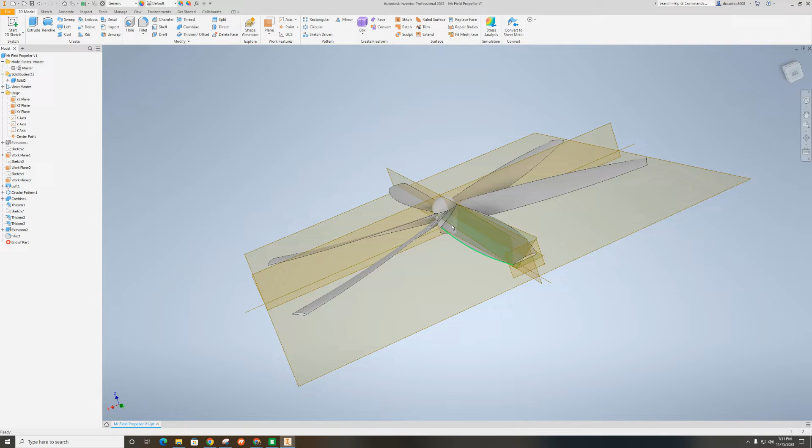I would ask that you guys think about the way you want to design yours. I did a 2-inch long blade, 6 of them, with a 35-degree angle of attack at the hub. But you guys can play around with variations on this.

Let's just go for it. I'll try to go as fast as I can, but I'll also cover some basics. So this is just going to be a standard IPT part.

Now, for those of you who are new to Inventor and have been using Onshape, you'll notice that the planes, the center point and the axes don't come shown. So what I can do is right click on them and make them visible. I'm going to save time by holding Shift and doing that for all of these.

And now if I hold Shift on the keyboard and use the middle mouse button, which is the roller wheel on the mouse, you can see I can rotate around and have that blue cube on the right, just like in Onshape. Okay, so here we go.

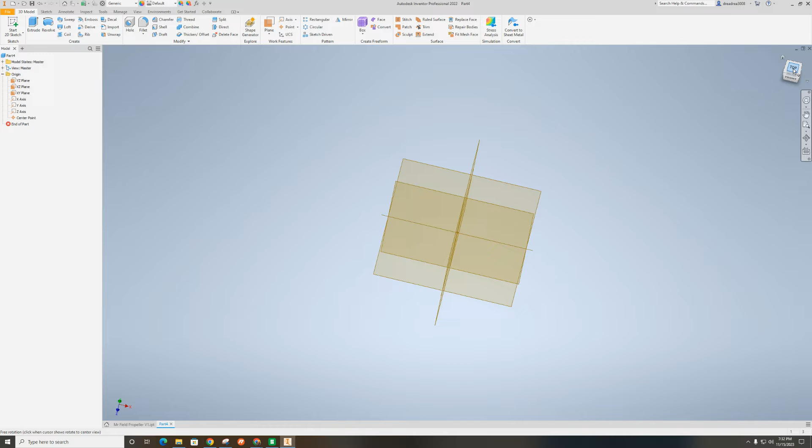I'm going to go ahead and start with this. I approached it the way it made the most sense to me, thinking of the plane, that the propeller is at the front, which by the way it doesn't have to be -- it can be at the back or the sides. But I'm going to pretend I'm looking down on the top front of my plane.

I designed the propeller with this methodology, and it worked pretty good, so I'm going to stick with it. What that means is the first thing I'm going to make is the round center hub.

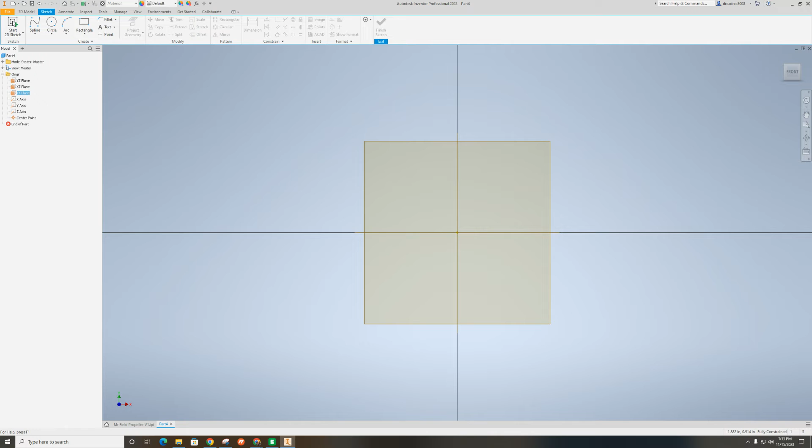I'll click on what I'm calling the front plane, because it's aligned to the front face here -- they call it the XY plane. And I'll sketch, and put a center point in.

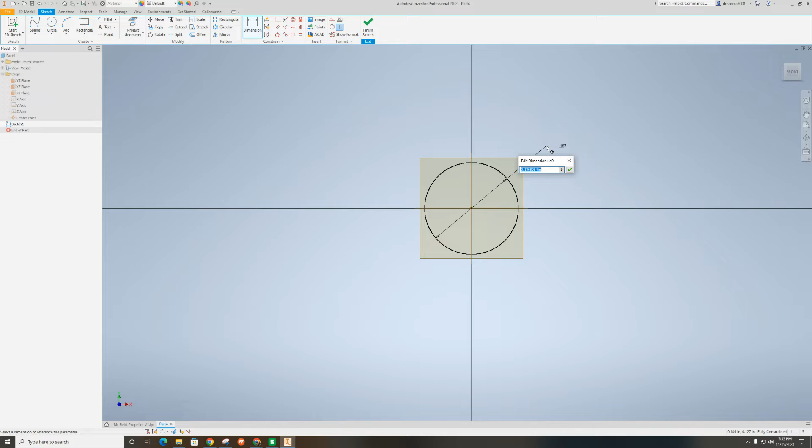Now this is going to be the diameter of the hub. If you read the article I put in there, there are different philosophies on how big the hub should be, with calculations and everything. But when I first did this, since the shaft itself is only 0.07 inches in diameter, I decided a quarter of an inch was fine. So that's what I did.

And then I finished that sketch, and then what I can do is extrude that. I'm just going to extrude it -- yeah, that's good.

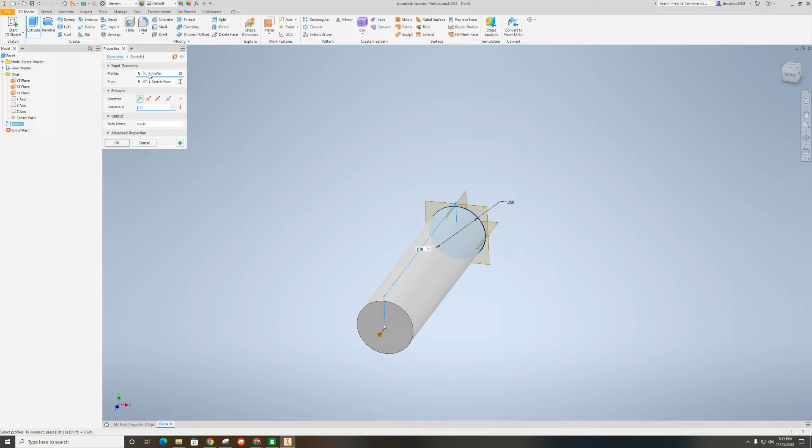I like to flip the direction. I thought there was an option to do that over here really quickly. I know you can always grab these handlebars -- there it is -- and then flip the direction.

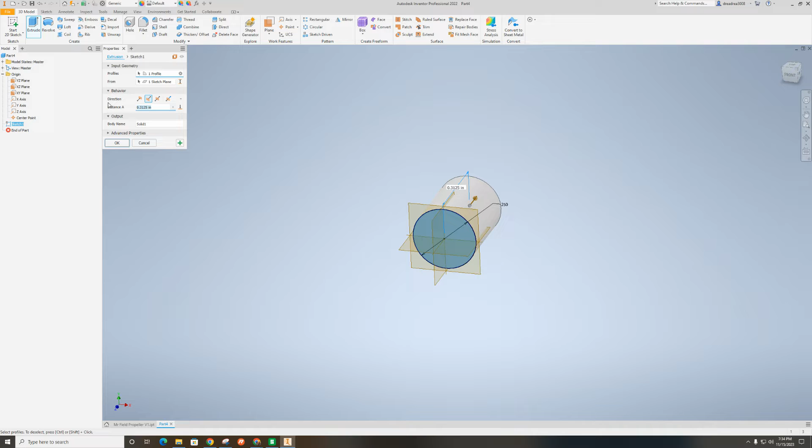I made it only a quarter of an inch in length, but then I realized it really needs to be a little bit longer at the very minimum. So I'm going to make this one 0.3125 inches.

All right, so let's view this propeller now from the top, and the blades will span out in each direction. I decided to just draw the first one on the ground top plane, and that first blade would go straight up in the air. So that's how I'm going to look at this.

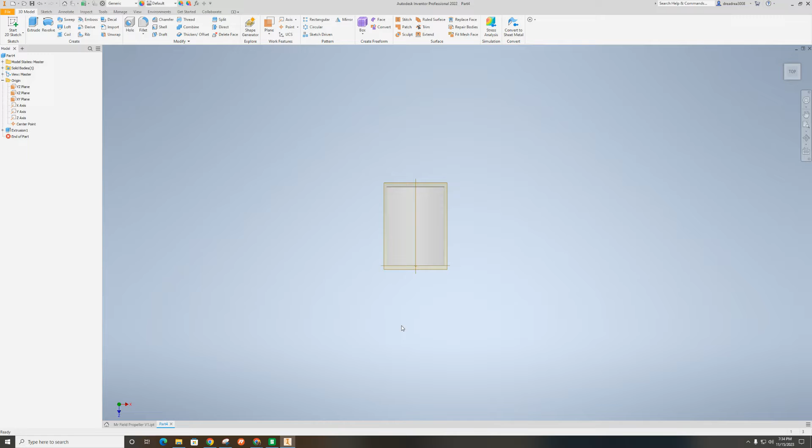So I hold Shift, I rotate around a little bit. All right, now I'm going to hit Sketch again, and this time it's going to be on a ground plane. This is where you're really going to put your angle of attack of the blade, on this face.

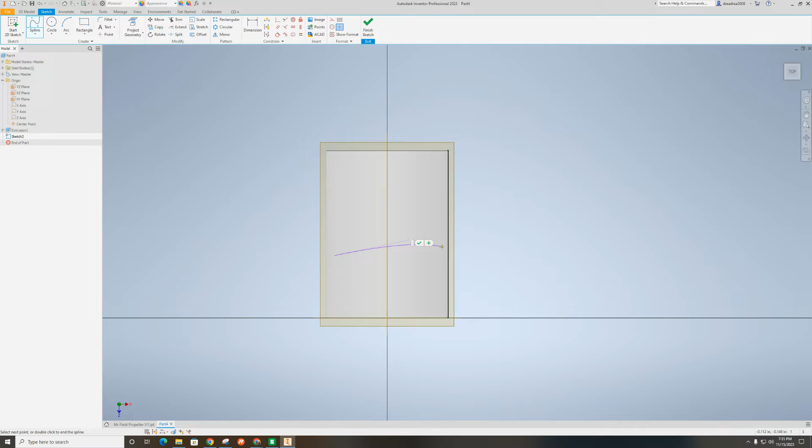When the blade is all the way out to the tip, that's where it's going to be more in line. And I'm just going to put a spline in here and get this started to show you what I mean, putting a basic airfoil shape, and then I'm going to double click.

I realized after doing this that one of the problems is that the hub kind of gets in the way here, and you can't see the sketch underneath the way this is designed. I think there's a way to change that in how we view the model -- I'm a little rusty on Inventor, so I'm struggling to think of it. There's a way to make stuff transparent, but I'm not going to fuss too much about that right now.

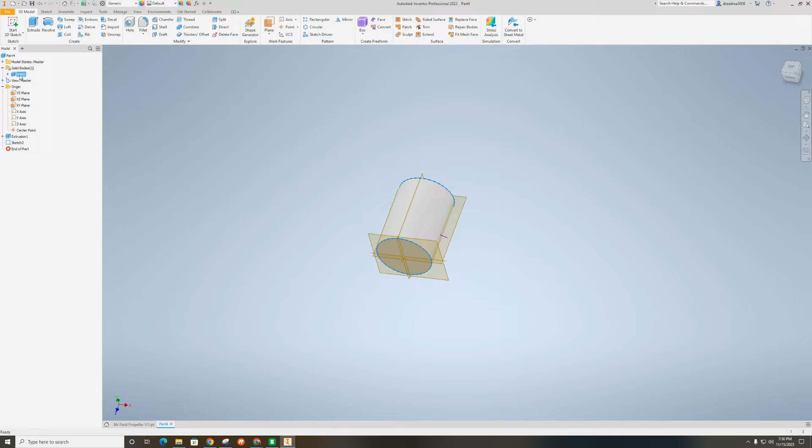What I'm going to do is my trick, which is come up here under the folder where it has all the solid bodies, right click and hit visibility off. We're ready.

I'm going to finish my airfoil profile. I'm going to go back into my sketch, and then the bottom is the one that's going to be more flat.

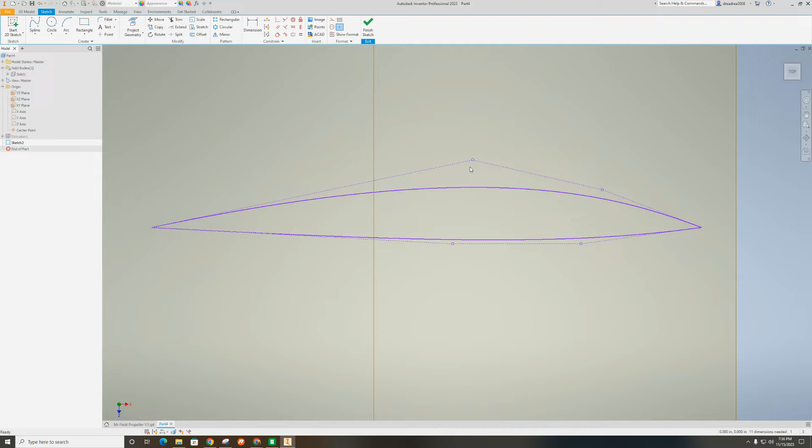And I'm going to put -- you're going to see I'm creating a 3-point airfoil, and this one at the top was a 2-point. Maybe what I'll do is just undo that really quickly -- undo that.

Redo that. And then what I want to show you, if you click that, delete it. I want to show you, I'm pretty happy with what I'd call a 4-point spline.

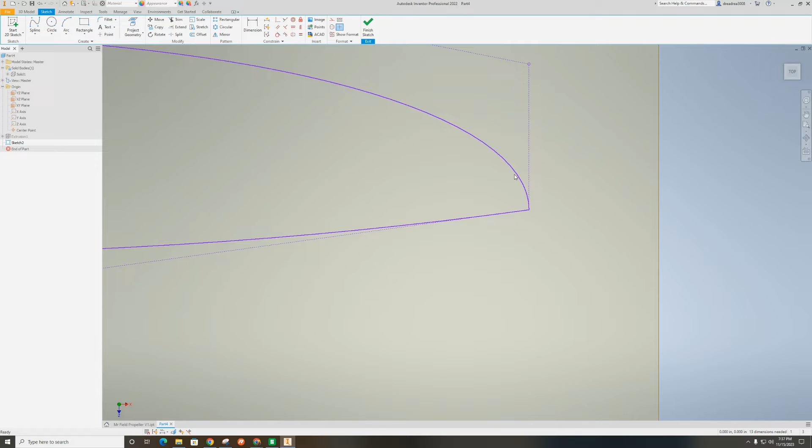To check, you can move these points around. And the other thing I like to do is change this, which changes the continuity of the curve at the front. So that's going pretty much flat right there, the front leading edge of this wing profile. And then this one at the bottom, similar thing.

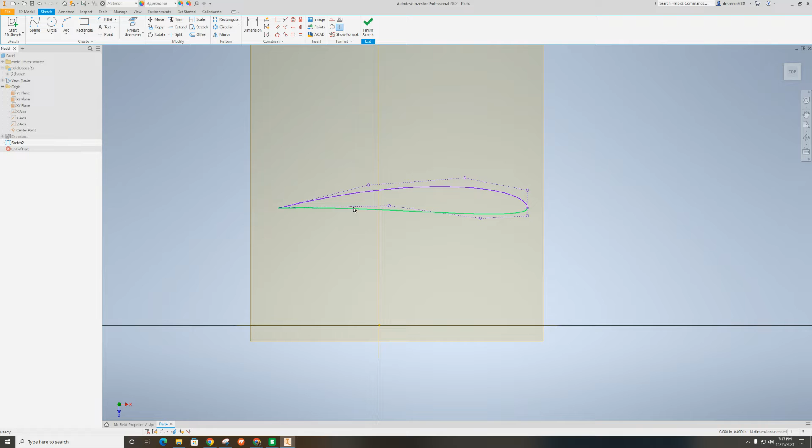I always pull that up so that it has nice continuity at the front. And then you can see you can do different tricks, and it may be advantageous to have another vertex. So you see I right click and I can add one. And then what you can do is pull that one out and also kind of trim it back so it kind of tucks underneath. That's a trick that I like to do for my airfoils.

It just makes me feel good, I like the look of it. I think in my mind it's also going to create more lift, but I'm not really sure. I just kind of guess at a lot of the stuff. Who knows? This may be the more advantageous shape. Okay.

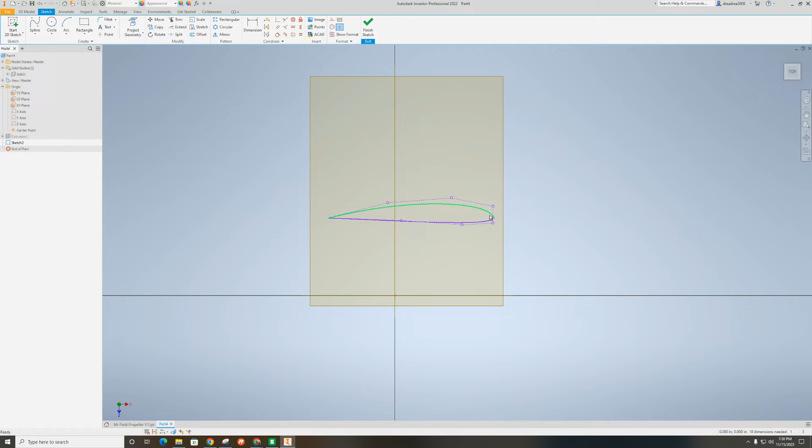I only created this to point out that if you're thinking about this propeller moving in a clockwise direction, viewed from the back of the plane looking forward through my propeller, let me point this out. If I was sitting in my plane looking at my propeller right now, this is going to be the first blade going straight up.

Now I'm going to come and just look at the top of it. What you're going to see is that it's going to create lift in this profile.

They have annotation tools, so I'm going to annotate this. Basically the air is coming over the top, and it's going to move faster than the air coming on the bottom. That's going to make this higher pressure and this lower pressure. This faster moving air is going to be lower pressure, so you're going to get a push, in a sense, coming from behind. That's how these propellers work.

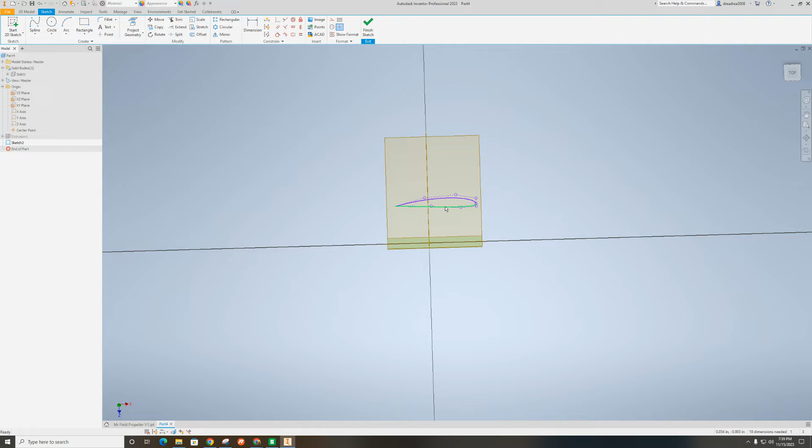So the end of the blade is going to be like this, because you want the end to be efficient and not have a lot of aggressive attack angle, because that's just how it works. So really, this is the profile that we're going to make for the end. I only wanted to show it to you, so I'm going to trim it out and show you what I really want to set up.

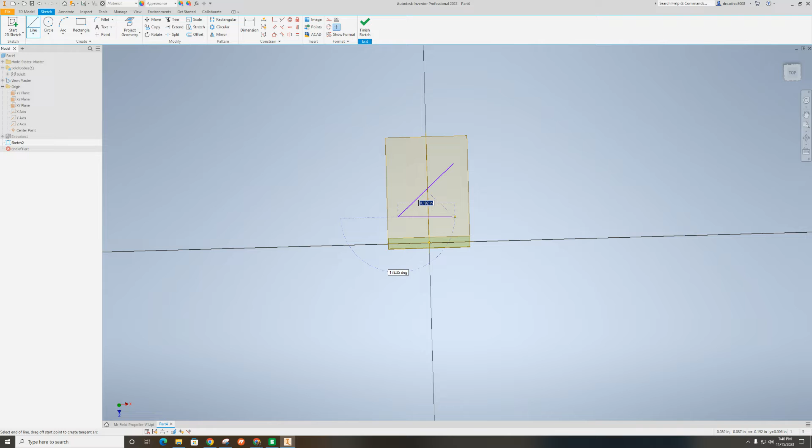I'm going to start with a line here. I really want to set up a center line angle of the blade profile, and I'll also add a line here to the base, just for reference. I'm going to hit this view so I'm squared up. There we go, you see this line is going to be horizontal. And then I want to define some angle to this.

So that's where I'm going to go and hit dimension. I dimension from there to there, it adds a line, 43. For the first one that I did, 35. So there it is, there's the first center line element in my airfoil profile.

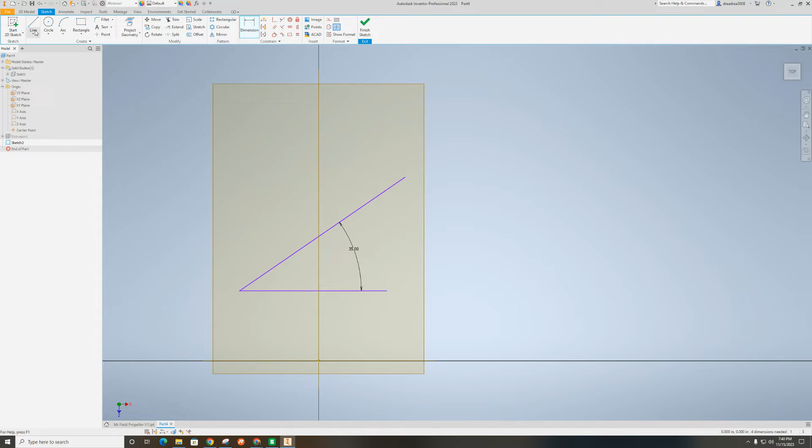So then I go back in, hit spline, and one more trick: I'm going to click on this one and make it construction. Also same with this one, right click on it, make it construction. Now I can go create my airfoil spline. You're going to notice there's two types of spline. I'm going to use control vertex spline for all of these.

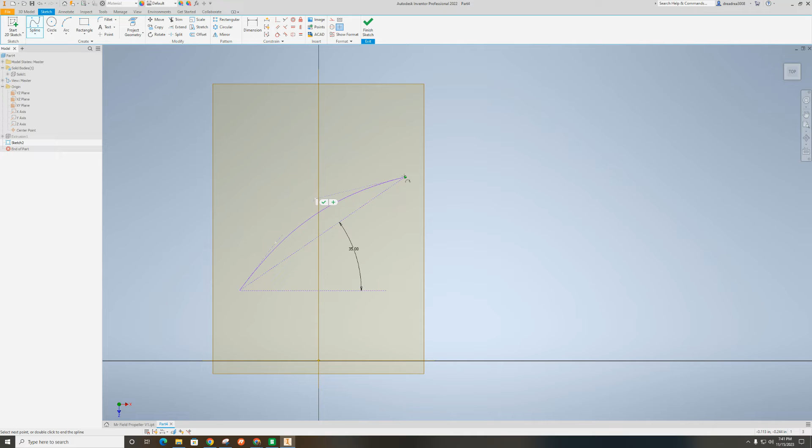Okay, so I do my 1, 2, and 3. It's actually 4 points total, by the way, if you count them up. It's 1, 2, 3, 4. So we'll call that a 4-point spline.

And then I can do my trick of making sure I pull the continuity up, and I have this one other point to control the continuity at the top. I want to make this one a little thicker because these three print really small, so a little body depth to the profile may help.

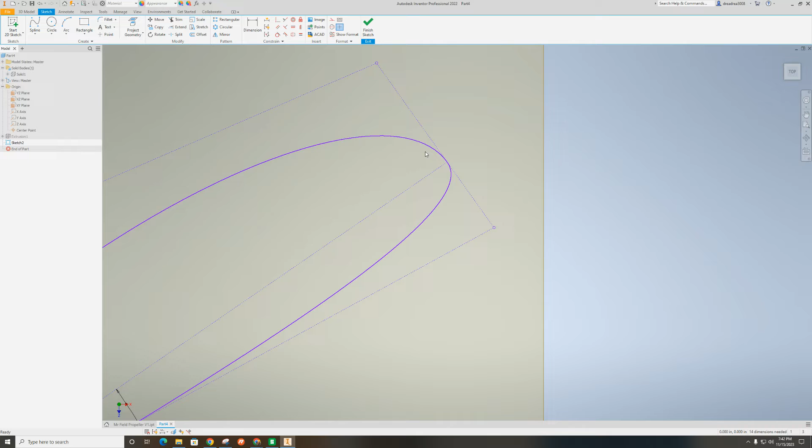And then the underside portion of my airfoil shape, so I set that up. One and two and finish three. Again, I make sure I've got that nice continuity here of the curve at the leading edge, and over here, just a real shallow angle.

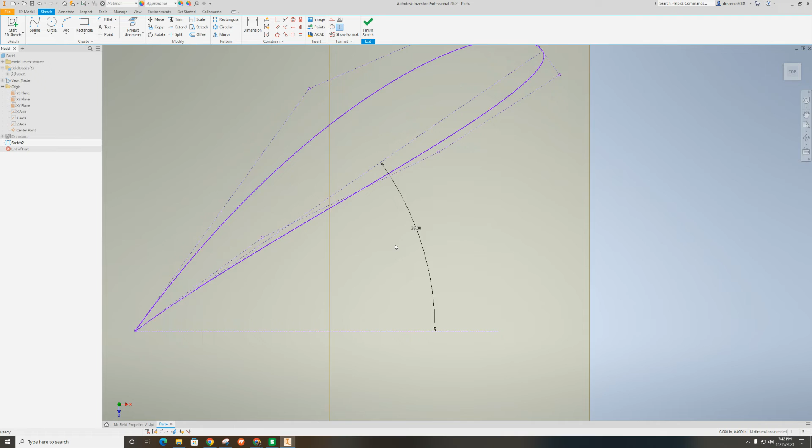I'm going to go ahead and do that other trick. I'm going to insert a vertex here that I can kind of dip this back under a little bit. I like it, but you don't have to do that. Okay, I feel pretty good about this. I'm going to bump this a little bit. There we go. I'm just going to sit back and look at it for a second, make sure I'm happy with it. I think I am.

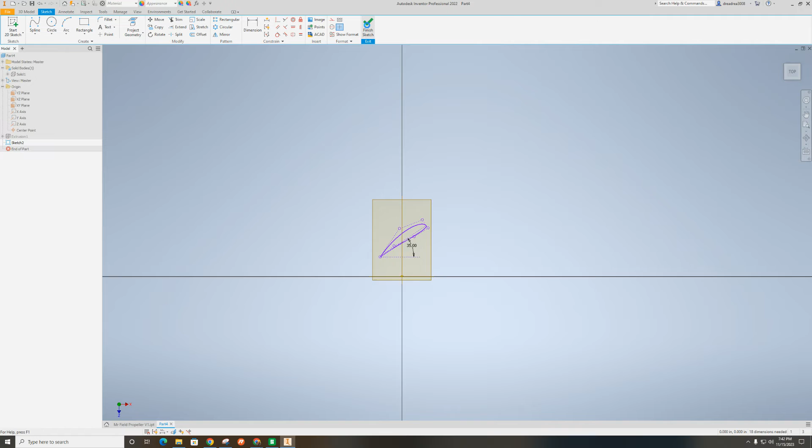That is going to go ahead, I'll finish that. Now I'm going to bring this solid back. I may have to make that invisible again later on. Yeah, I will—actually I'll just keep it hidden for right now.

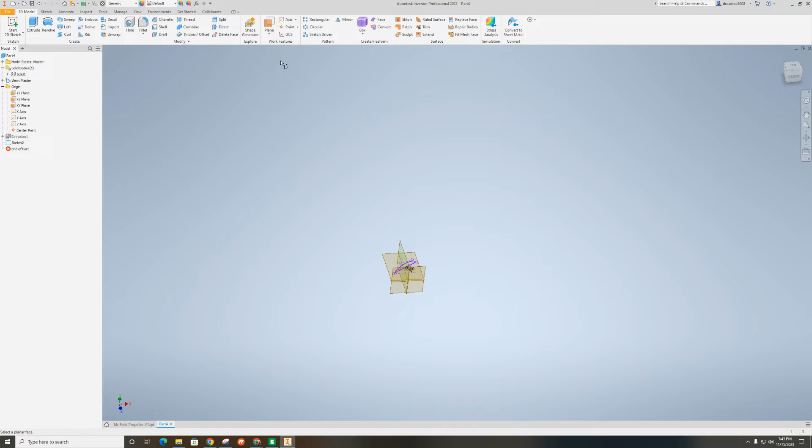Now, the tip of the blade, how do we create that? What I'm going to show you is you do that by creating a plane, an offset plane, offset from the top. How far? Again, I did mine as 2 inches, so I'm just going to type in 2 inches, hit enter. And now up here is where I'm going to complete the other part of this.

So I sketch up here. And now this is the one I told you that you want to tip it and have it in line so it's more efficient. At the base, at the hub, it's okay to have a lot of attack angle, but as it twists and helixes, then flatten out to a more efficient profile.

So, make my spline, and I just want to have it basically in the middle as well. It wouldn't hurt to go ahead and put another line element in here as such. Hit escape and then right click and make that a construction line.

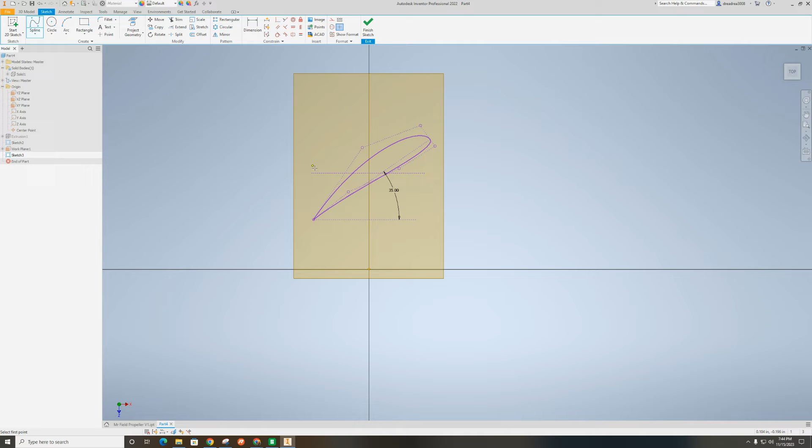Then I can put my spline here. So 1, 2. You can see what you're dragging out. If I click that, there's a little symbol there that makes those two parallel. I always try and stay away from any of those types of constraints because they can really frustrate you later.

Okay, you know that trick already. I'm going to go ahead and keep it with a little bit of broadness—I think that's going to help the strength of my blade. And then...

Add vertex, insert vertex, here. I could escape, drop it over there. There we go.

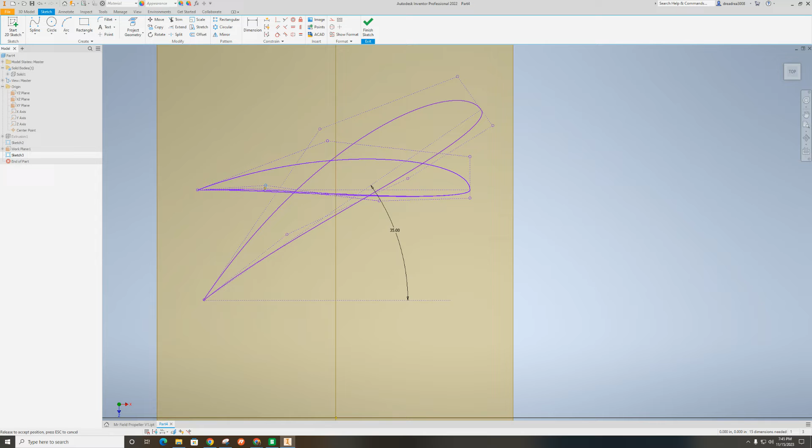Okay, so basically we're going to use a loft to connect these two. Let me show it to you—even though we're not going to, I'm going to modify this with a couple of guides, and I'll show that to you on how you make that. But if all I did was loft these, then I could pick that one and click in here to add another one.

And why is it showing? Pick that one at the bottom. No. Switch—be able to go ahead and just pick this.

Sketch, yeah. Here, let me try this one more time. Sorry guys, loft—and for some reason it won't let me pick that first sketch. I don't necessarily know why it's doing that to me right now. I wish I did. Let me try it one more time.

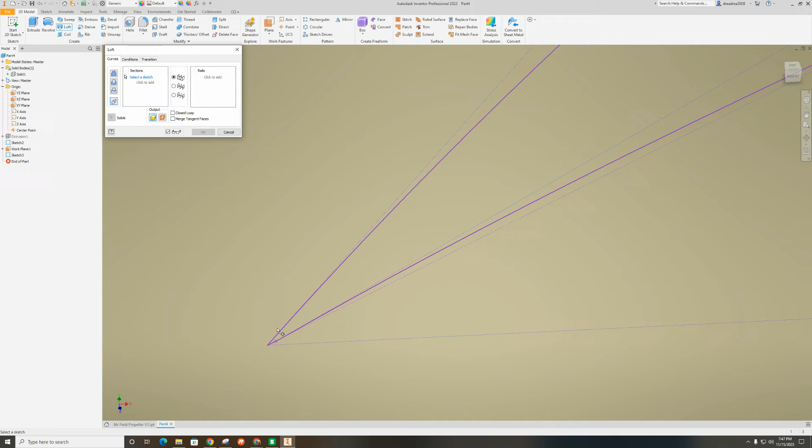Loft. Oh, here, by the way, I forgot—make sure when you're doing this, you're picking new solid. That didn't seem to make any difference to picking the sketches down here. But let me make sure this is a closed loop sketch, which it is. It may be, that may be the problem here, that I don't have a closed loop sketch on this first sketch. I thought I had it nicely connected at these points.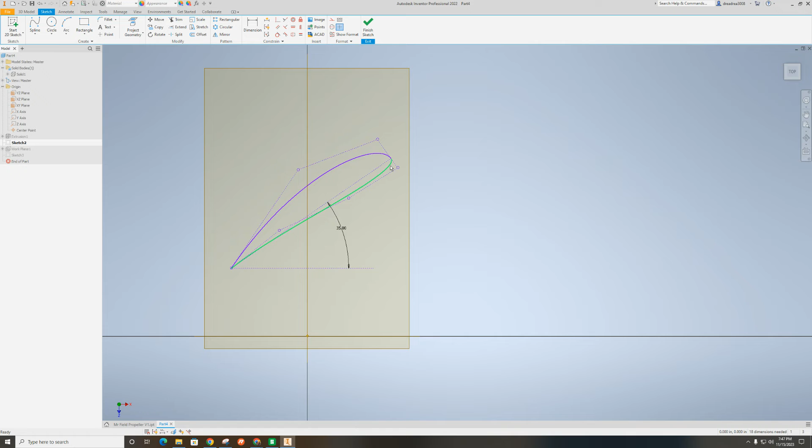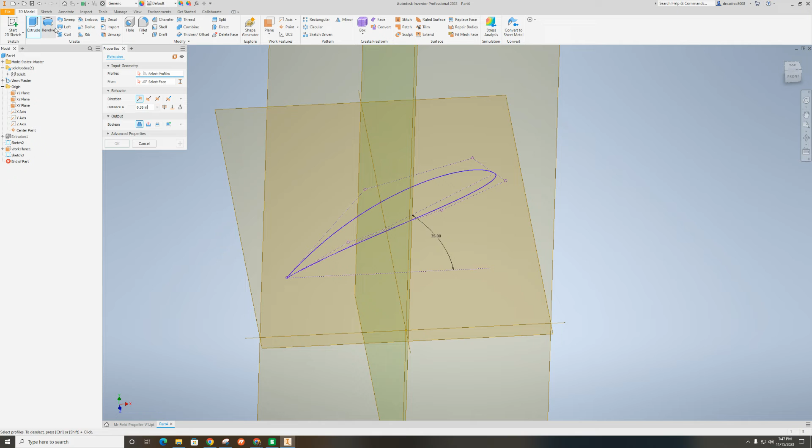So what I'm going to do is just recreate it and see if that'll solve our problem. So even though we already had that sketch, I'm just going to go ahead on a new sketch here quickly, not taking too much time. I'll basically just duplicate that one.

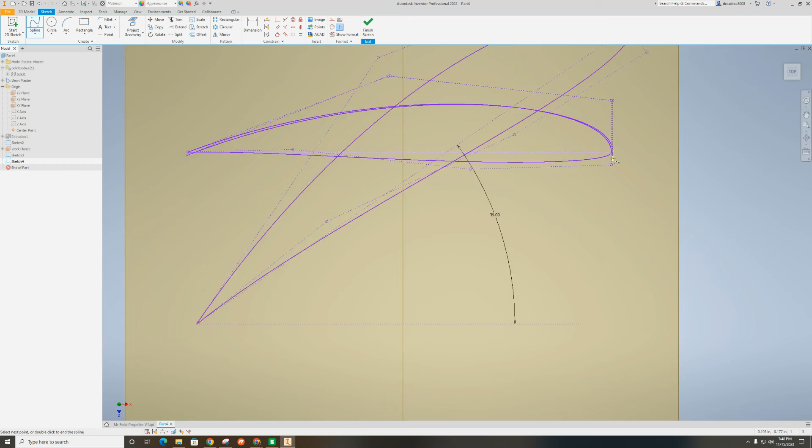There. And click it to finish it. Pretty good. Not many complaints about that. I don't know how to finish it. I don't know. Let's, yeah, it lets me pick it. Okay, well that's good. That's what we needed. Oh, sorry, wrong one.

I wanted this one at an angle. I think I just messed up the sketch that I just made. I didn't put it at the angle. You guys probably hate me, but all right, just fast forward to that.

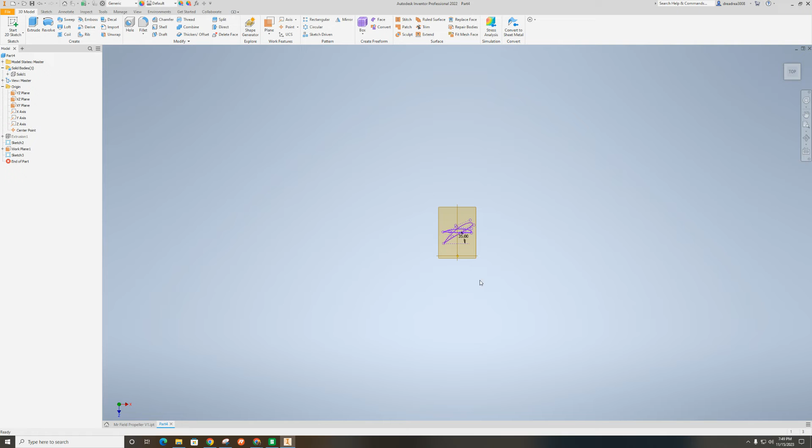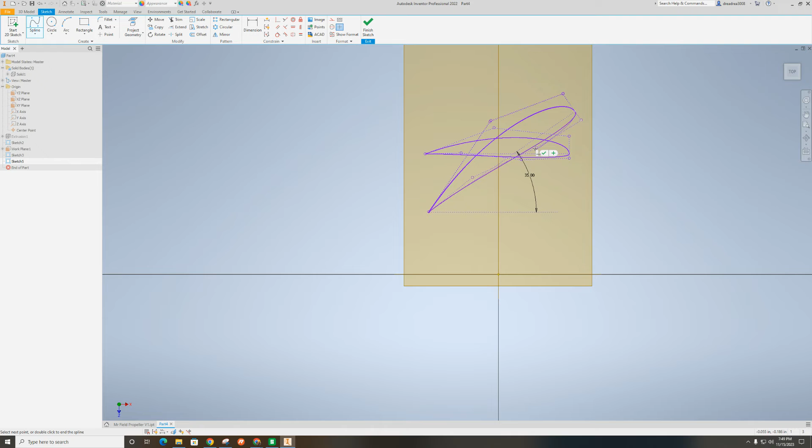Once again, from the top, I'm going to sketch this spline and make that spline. This time, it's going to be... Oh, where's the... and one line from that point. 1, 2, 3. All right, finish. Now, will it let me do that now? I'm going to go ahead and hit home here so I'm getting more sense of it.

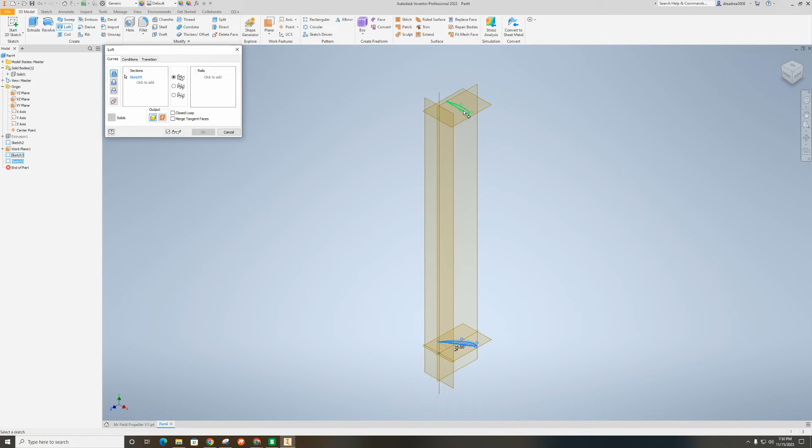Now, loft. Thank God. All right. So it did let me pick that one. And then I'm going to go ahead and click another one to add to that. Now, this is where I want to show you how the loft feature works. So it creates it right up here. Oh, by the way, when I did this, I didn't hit new, and I need to. So I'm gonna reopen it. There it is. So you guys can see it. That looks good.

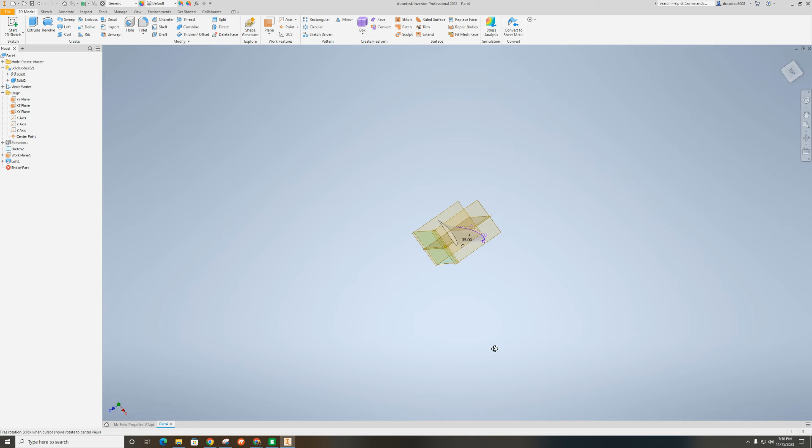Looks like a turbine, looks like a blade, and that would work in and of itself, but I'm not done with that. Although that would work. If you made a smaller profile, it would come to a bigger point, vice versa. You could make it bigger on the outside and smaller on the inside, but that's certainly a good start. What I like to do is add a little breadth, a little width in the middle, a little curvature on both sides of the blade. And so I'm going to show you how to do that.

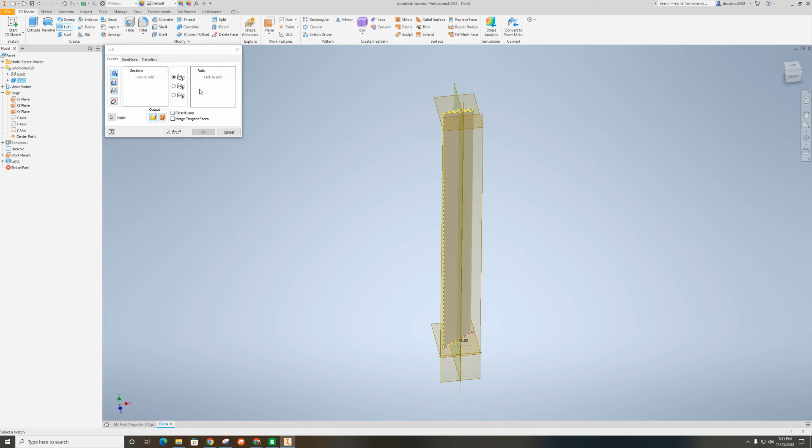And when you're doing a loft, I'm going to double click on this loft and show you that you have an opportunity to add rails. So if I add additional sketch elements, which will tell the loft how to go, I've got to create those elements. So what I'm going to do is delete this loft. Oops, it also deleted that sketch, which I didn't want. I'll just undo it. Where did that sketch go? I think it's underneath the loft. So I'm going to back up one more. There it is. We've got 2 sketch elements.

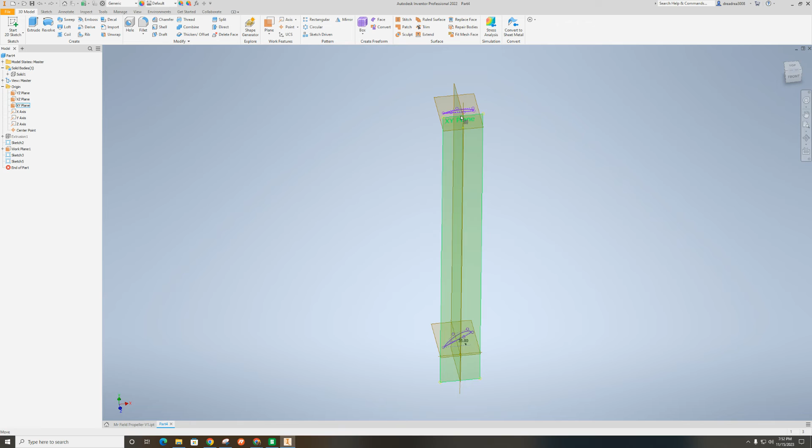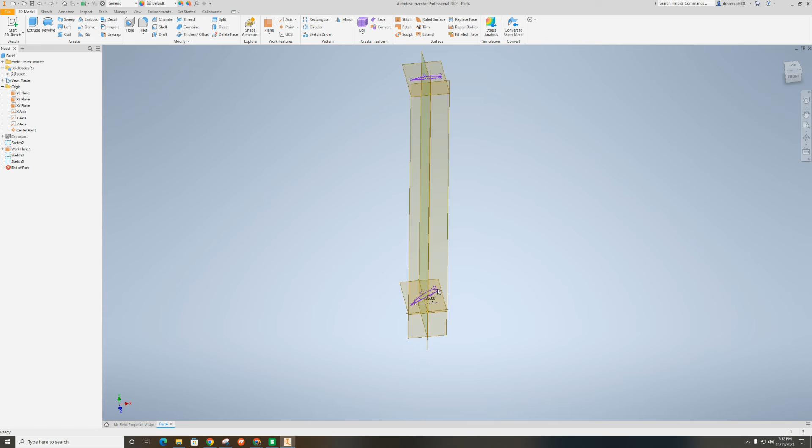I'll show you the best way I can think of to do guides or paths, additional rails for a loft. It's important that we connect that point to that point. And to do so, you just need a plane that goes through that point and that point. And then you need a third point to define a plane, since in math, 3 points define a plane. So I go up here and I hit plane, and I do the 3-point plane. And I zoom in. I'm careful to make sure I get the right point. Get that point. And I get that point.

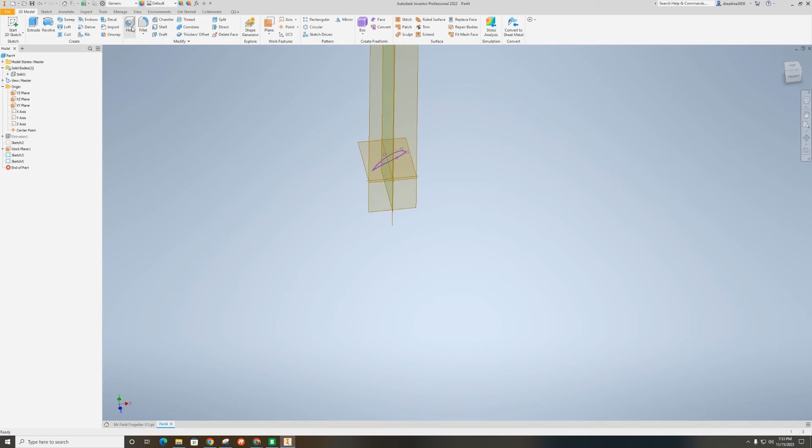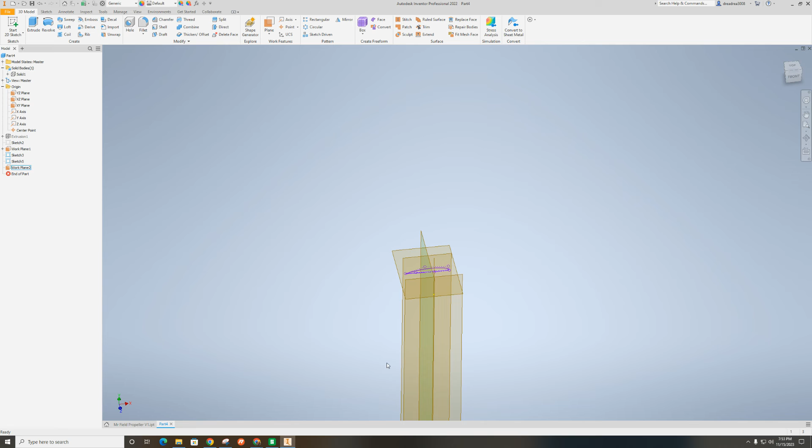And by the way, let me see. I want to make sure that thing I need to make invisible. I don't want that one to get confused with the one I'm actually using. There we go. So let me go back to plane, 3-point. It's going to be that right there. So now it pops in there. That point is point 1. That point is point 2. And I just use the back edge of this top profile to create that additional point. And you're going to see it did put a plane in that I can use. So that's work plane 2.

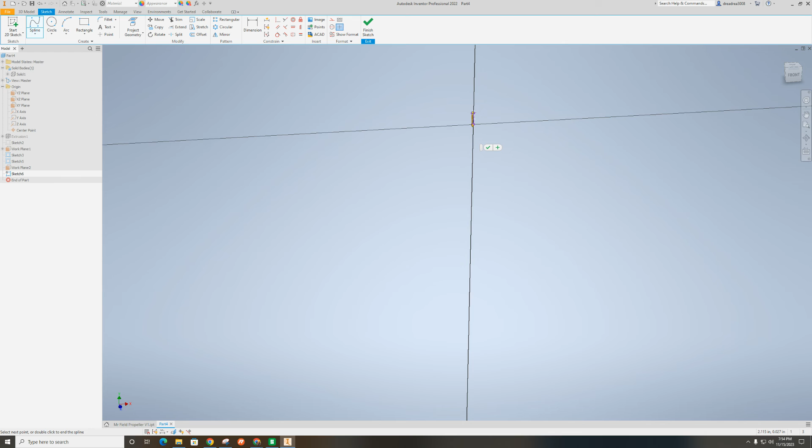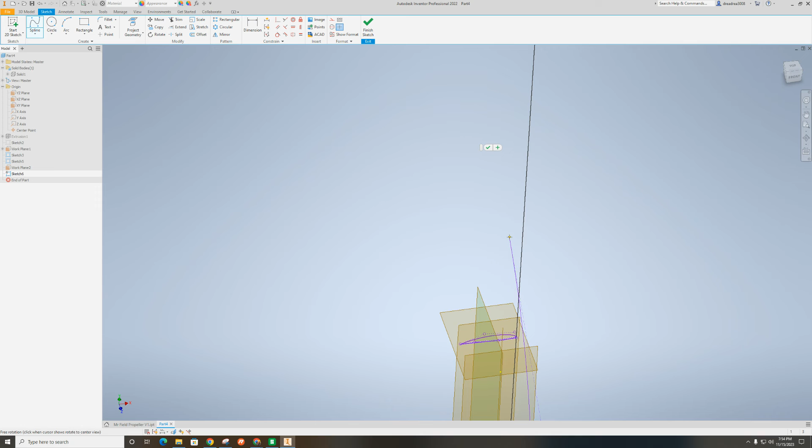Do a sketch on it. And quite simply, just put a spline in from that point. I'm careful to zoom in and make sure I get it. And in this case, I'm only going to do a 3-point spline. I just put a point out there, and then I go to the end point. And you'll see it, hopefully, since that point is on this plane. You're going to see it's not showing me that highlight. I'm going to view this as best I can from the top.

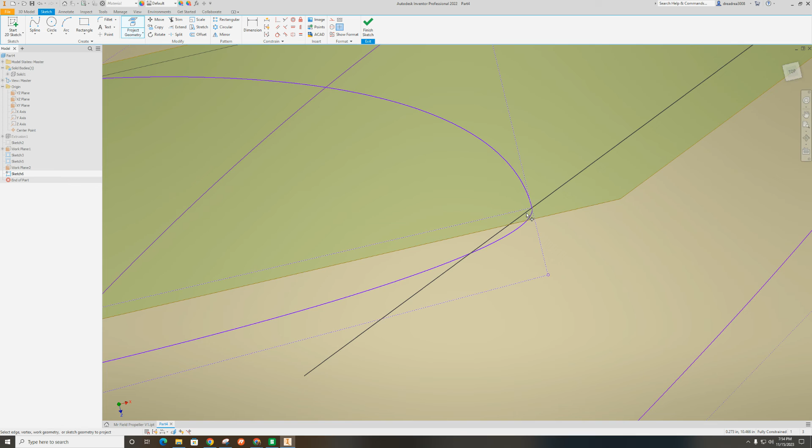I really need it to be right at that point, and it's not showing me that right there. So what I need to do is hit this Project Geometry tool, and now it put that point exactly on my plane. So now I can go and finish that spline. It's not a bad idea to make sure you do that on the bottom too. You want to make sure you pick that point as the point that the spline connects to. Okay, so let me redo it.

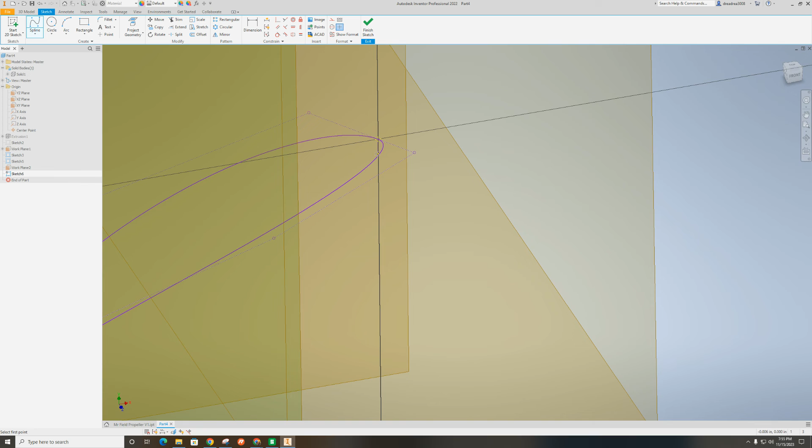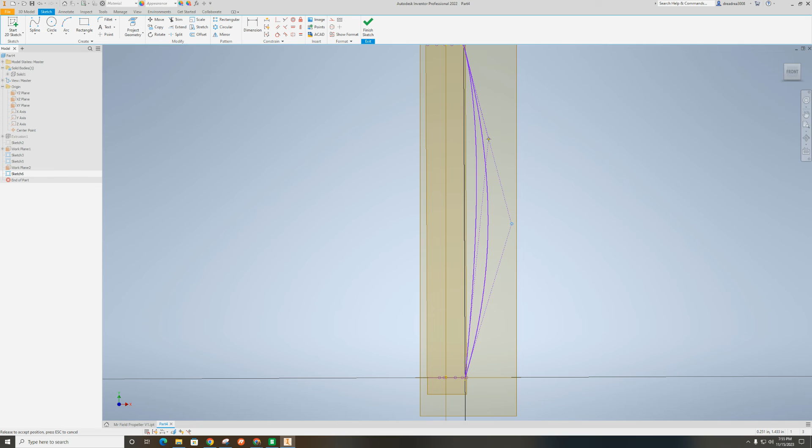Spline, zoom in from that point. I'm just going to click out here. I'm going to move that later. And then I'll come up here to that point. You see it actually clicks, and now I can finish. Finish. And now view it from the front. I can see, all right, how much bulk or contour do I want in my blade? I'm just going to pick something like that on that side, and then finish sketch.

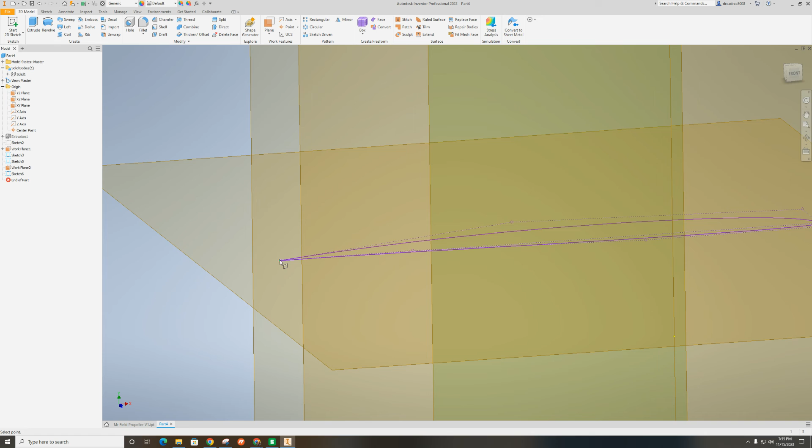Now I also want one on the other side, so guess what? I got to go with my plane tool, do the 3-point plane again, and this time I want it to go through that point. So I pick that point and that point. I want to make sure I'm careful here. See how that point is not the one? It's that one. And then I'll pick the other plane point here on the bottom. That's my three-point plane.

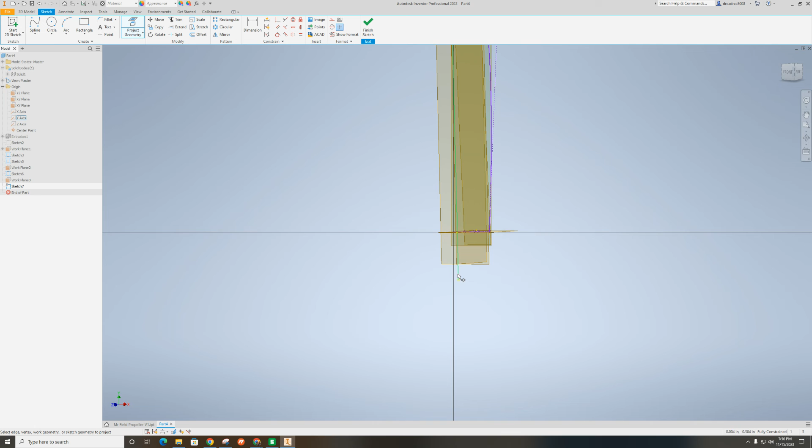I go over here to that new plane and I sketch on it. And I use the Project Geometry tool again. That's always a good idea. And I'll zoom in and with that point and that point. Make sure I put the right one. Actually, that point. See how I wasn't careful in that case? So I just deleted that. That can cause a lot of trouble and frustration. So now I put my other spline in.

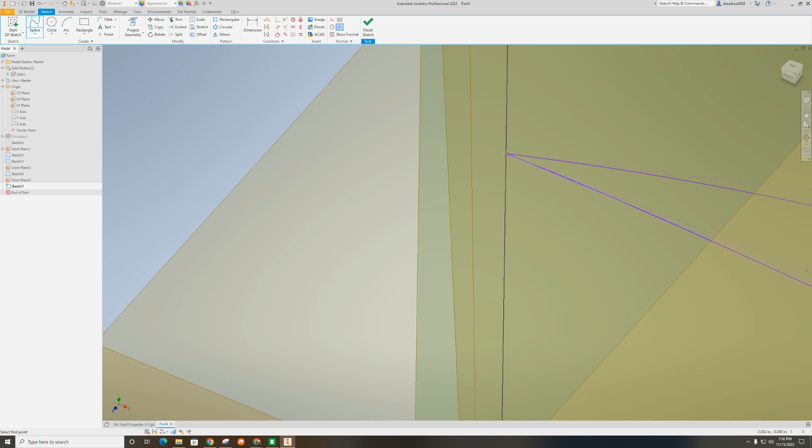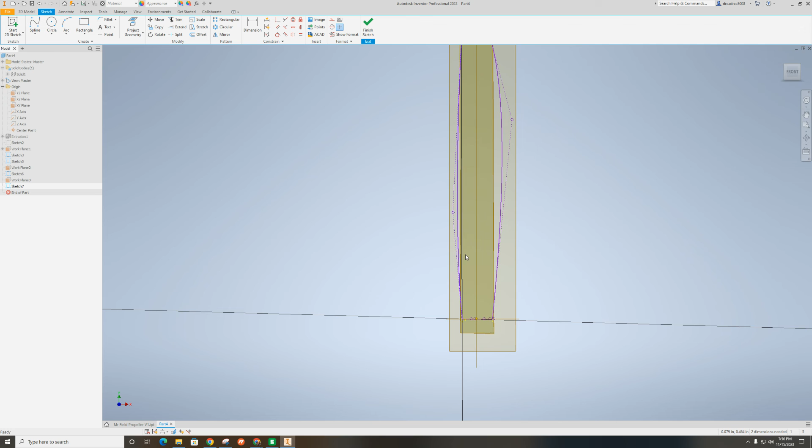So it's going to go from there out, and then it's going to end right there. Check that. All right. And so what I'm going to do is just kind of view this from the front. And I think I like this. I think I'm going to keep my trailing edge a little flat, and I'll have my leading edge have the greater amount of contour. Oh, that's on the other sketch plane. That's right. So this will actually probably work.

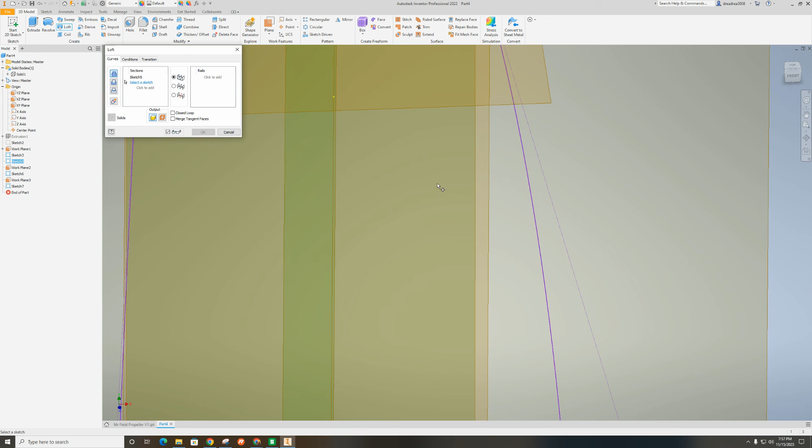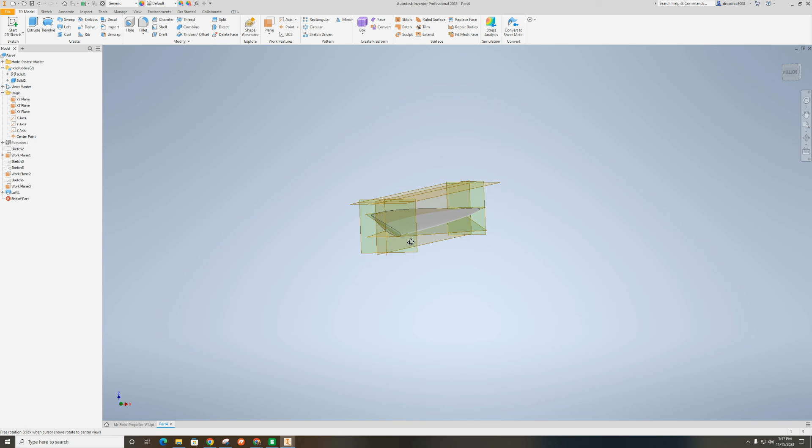And so now I'm going to go create my loft again. So it's that. Click to add. To that. Now I can add this. Click to add. So click in here. Click to add. Okay. And make it new. Make sure it doesn't add to anything that's existing. Now I'm going to say okay. And there she is, guys. So now you see that's my turbine blade right there.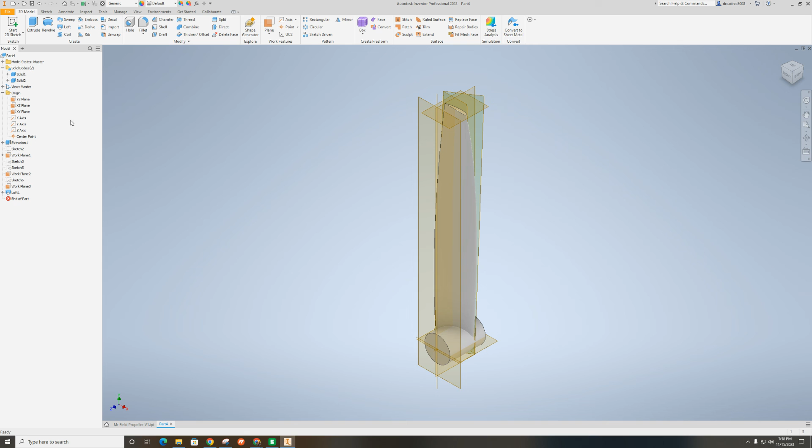So let me finish this up. It doesn't have to take that much longer here to finish this up. Now that you got that done, you got most of this done. And so that's going to be the top of it, and that's the bottom. And I'm going to go ahead and pull the visibility of the hub back in. And now I just need to do a circular pattern of this around.

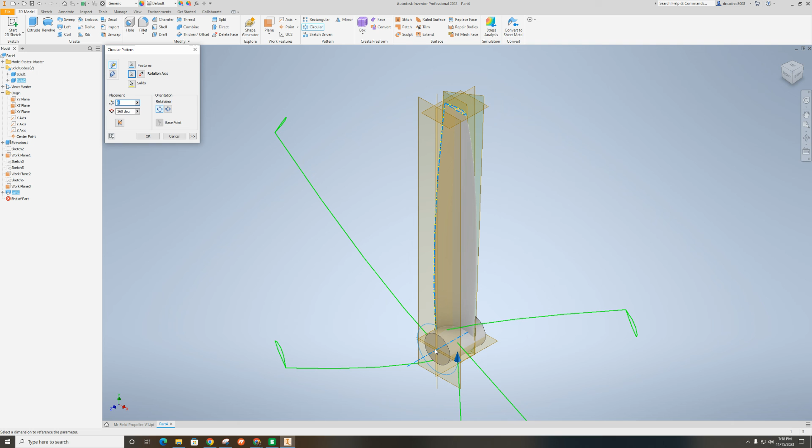So I hit circular, but I want a pattern. I want the pattern. I'm just going to try and pick it here. Yeah, that. And then rotation axis. It's going to be this axis. It defaulted to 6, and that's why I chose 6. I was just, all right, I'll try 6. But obviously the number of rotations here is up to you.

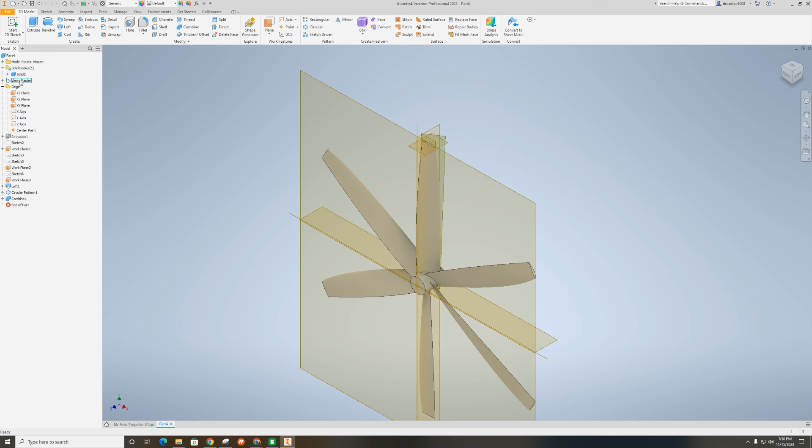Then I wanted to combine all of these together. So I'm going to select them and select that. Okay, now it should just be all one solid. There we go. That's really enough to get started. I put one more feature in. I put a fillet on my ring here, and it made a little bulb. And you could dare to pull that back or make it less. But I was pretty happy with that, so I accepted it.

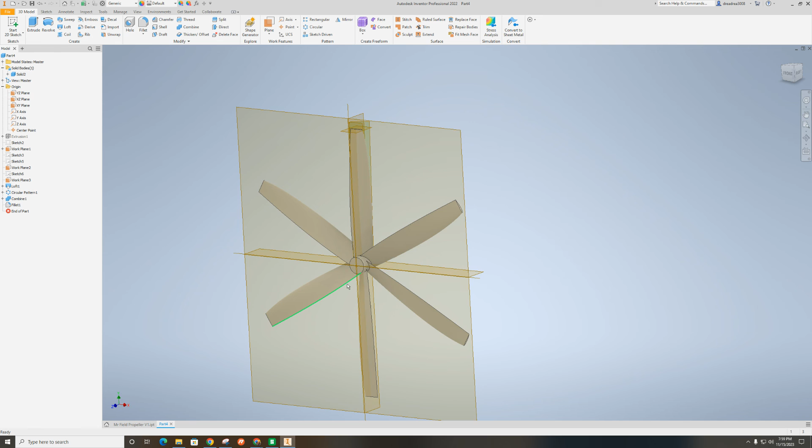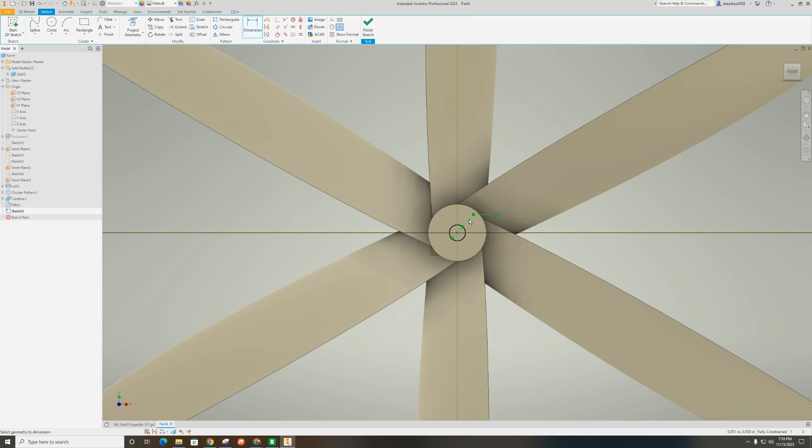And the last thing I would do, and I did this, but it turned out that I had to drill this out anyways to get it onto the motor. But we might as well have a point to drill at. So what I did is on this face, go ahead and sketch and put in a circle and just dimension it at 0.07. And accept that.

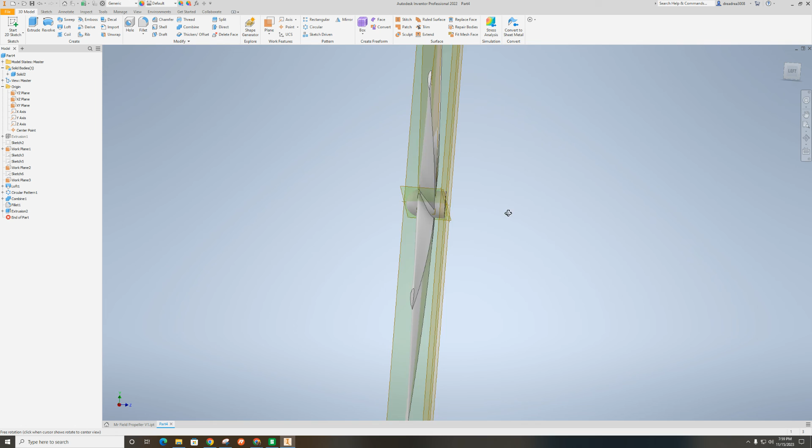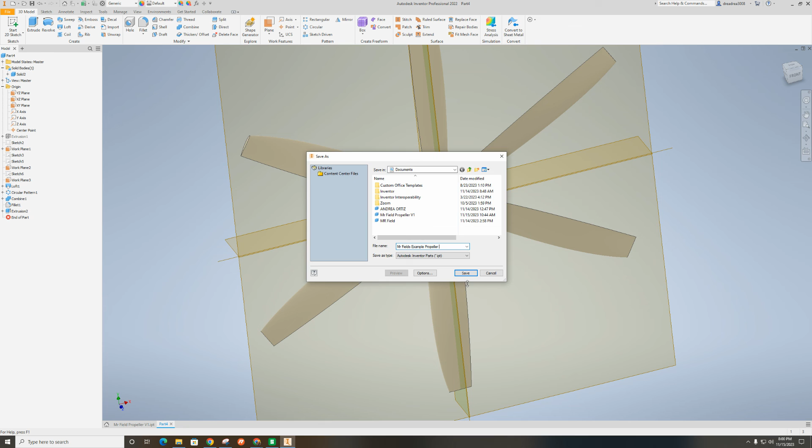And then extrude, remove, and not all the way through, but I just went through 0.3 inches. Through, there we go. Done. I'm going to save this. Call it Mr. Fields Example. Okay. And it's going to save it in my documents folder. Good to go. Now I can download and preview this.